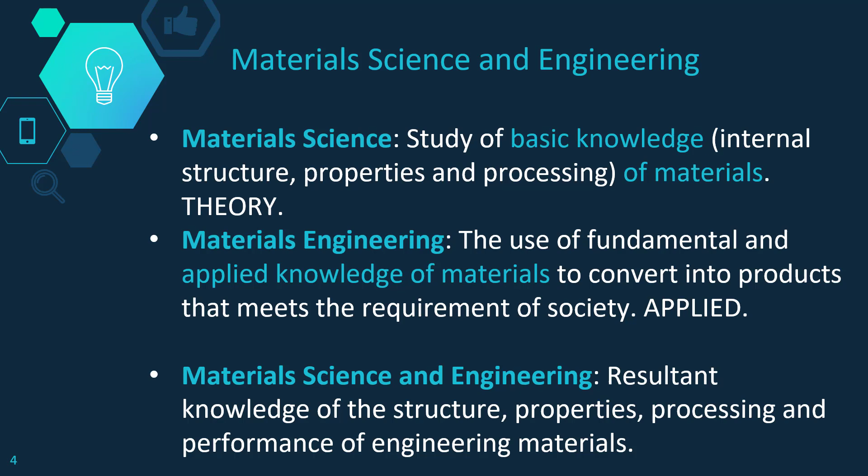So when we combine both of these, materials science and engineering, it becomes a resultant knowledge of the structure, properties, processing, and performance of engineering materials. Therefore, it is very, very important for you to remember this tetrahedron of material science and engineering, where we have the structure, properties, performance, and processing, which are interacting with each other. And when we understand that it is interacting with each other, then we could understand better material science and engineering.

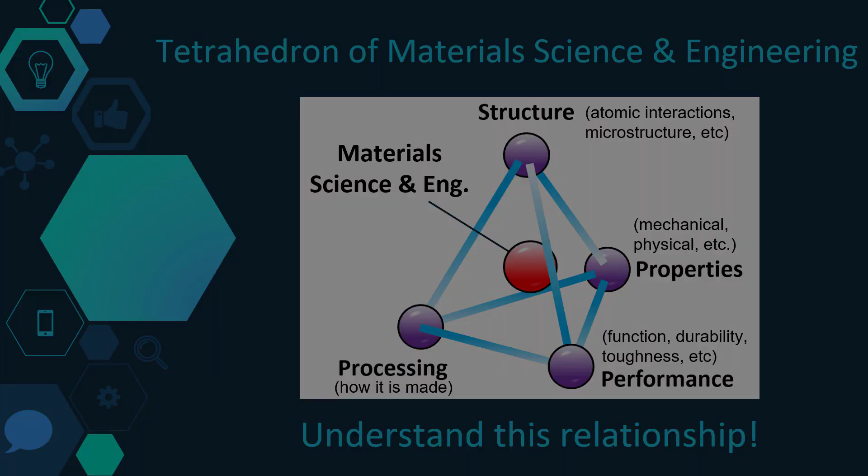Okay, moving on. As I mentioned before, engineering materials consists of several materials, and we're talking about overall materials available around the world. So one of which is metallic, polymeric materials, ceramic materials, composite, and semiconductor. In this course, we will be focusing more on the upper side of the materials list, particularly for metallic materials. But all of these materials have mechanical and physical properties we have to consider.

So as we mentioned before, when we say properties of materials, we are referring to the way the material responds to the environmental and external forces. So there are several properties of materials that you have to consider: mechanical properties, physical properties, electrical and magnetic properties, thermal properties, optical and chemical properties. So we will go through some of these one by one, but we won't go into much detail of some of the others, like optical properties, because this is a little bit more advanced.

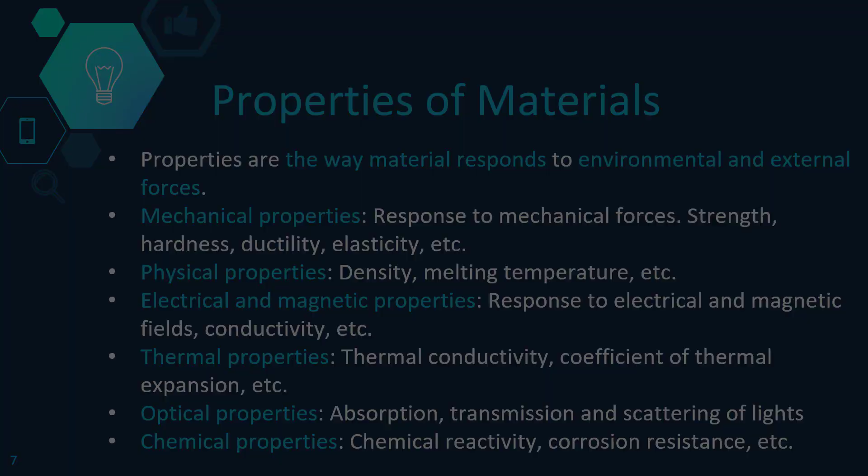Now, once we know that there are several materials around the world, and that all the materials have their own properties, then we understand that because of these specific properties, they are used in specific parts or specific functions. So one example here is engineering materials application in a car. Okay, so we have a car, and even though you don't take this course, you know already that cars consist of several materials and they are not the same. Some have high hardness, very good strength. Some have a very elastic property, some have shining properties, some have transparent properties, and things like this.

So in a car, in general, we can say that since steel is the most widely used metal in the world, ferrous, or what we call steel, makes up around 50 to 60% of the whole car. So the main material used in a car currently is iron or steel, which is ferrous material, and that is around 50 to 60%. What others are inside the car? So for instance, we have aluminum, which is around 5 to 10%.

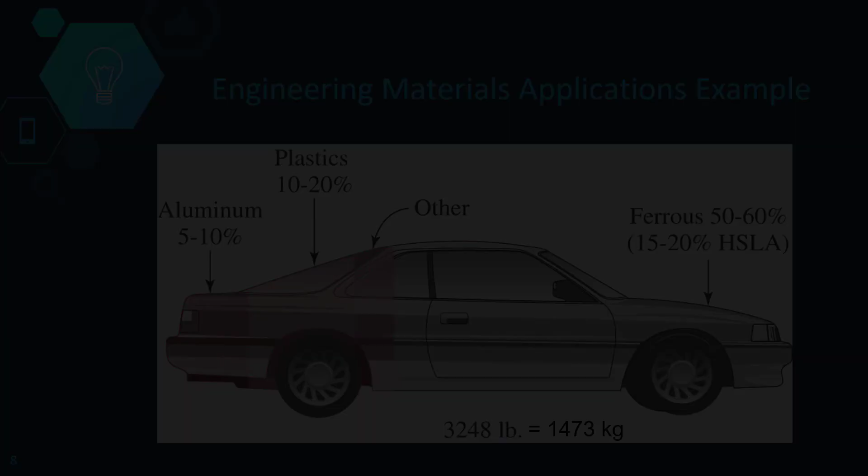Now we're going on to explain in general some of the materials that we've listed just now, for instance the metallic materials, the ceramic materials and things like this, in a little bit more detail. What we call metallic materials, by definition, are materials composed of one or two metallic elements that may also contain a non-metallic element as well. What we mean by metallic elements here is the chemical elements in the periodic table that we consider as metals. And some can also contain non-metal elements as well.

Some of the properties that are important in metallic materials are that they are crystalline in structure. We'll go into more detail on what crystalline means, but basically the atoms are aligned properly in the microstructure. They are also thermal and electrical conductors, so the heat conductivity is good and the electrical conductivity is good. We can conduct electricity through the material, and we can also conduct heat through this material.

They also have strong and ductile properties at room temperature. Usually metals are strong and also have ductility, which means that you can stretch the material to a certain extent at room temperature. Metals also have good strength at high temperature, and they are shiny when polished. Usually most metals are gray in color and have this shiny property as well.

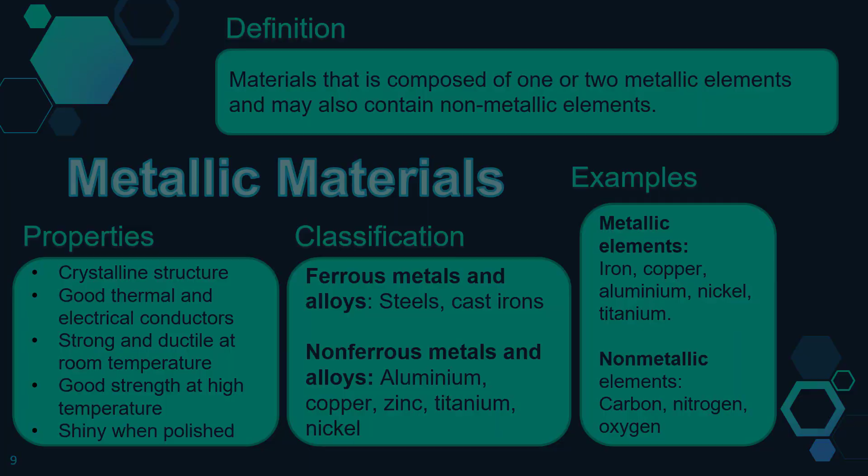Some applications of metallic materials. I think you are also aware of this; they're everywhere around us. For instance, aircraft turbine engine parts. Even though there are some other materials involved, the majority are metallic. There are also mechanical parts in your printers, in your mobile devices, in automotive engines. We have gears, valves, lots of other things. These are all metallic materials.

We also have bridge structures, where the main component is usually metal. The reason is that it's strong, which means cars can go over it without any issue of it breaking down. Even though there are still other materials like concrete, rubber, and some other components, the main structure is still metal.

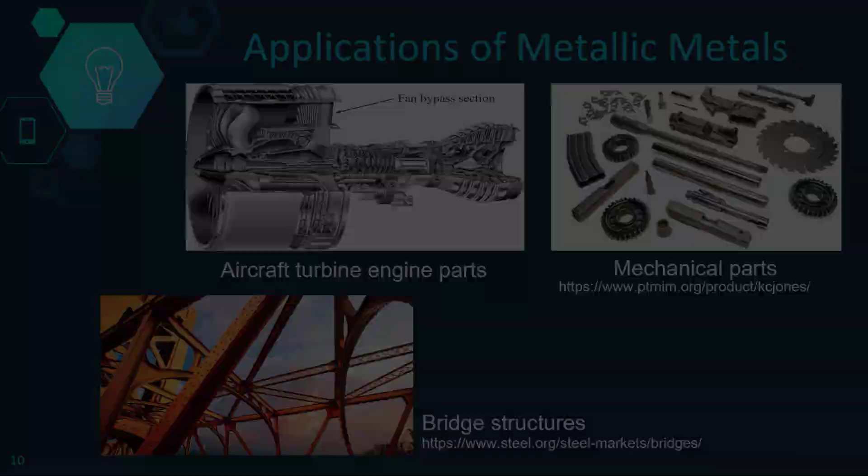Moving on to polymeric materials. By definition, polymeric materials are materials made of long repeating chains of molecules. At the atomic scale, when we look into it, we see the molecules forming long repeating chains of the same thing.

In terms of properties, most of them are non-crystalline in structure, and some are mixed, in the sense that they have crystalline and also non-crystalline regions. When it's non-crystalline, the structure of the atoms is not aligned properly. In some cases we call it an amorphous structure, and we will discuss this in more detail later.

Just a rough view of what polymeric materials are. It varies in strength and ductility, and it has a poor conductivity of electricity. So when you use polymeric materials, you cannot conduct electricity, but it has good insulating properties. So insulator means that it can retain the heat. So if you have heat involved, it will not make the heat go away easily. Okay, and it also has a lower density, which means it's lighter compared to metals, and have low softening

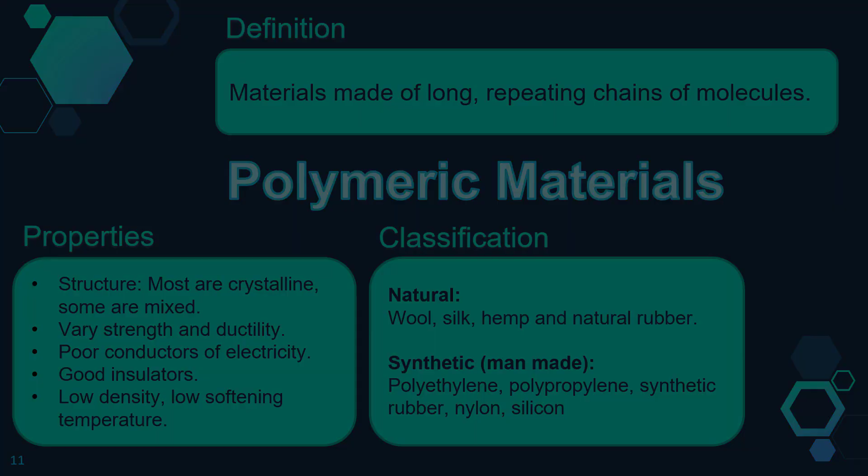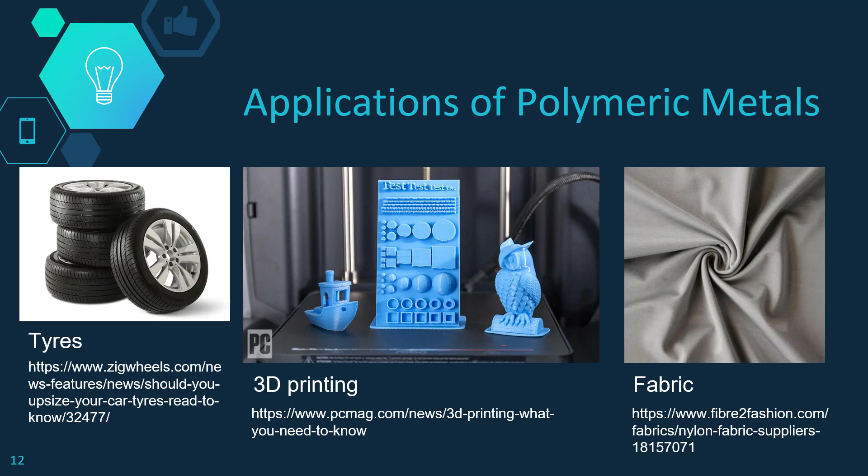Okay, so in terms of applications, you can see, for instance, tires, 3D printing also. So 3D printing, we're using polymers. We melt the plastic and then make the component layer by layer, and then we get this beautiful owl or other shapes. This uses polymeric material. So this is a typo there. And then we also have fabric like nylon. So nylon is made of polymeric materials as well, and it is also widely used around the world.

Now we go to the ceramic materials. By definition, it consists of metallic components and non-metallic components chemically bonded. So in the atomic structure sense, you will see that both of these are combined together, metallic and non-metallic elements. Usually a combination of semiconductor materials with oxygen, nitrogen or carbon. So this is just a definition. But the important one is it consists of metallic components and non-metallic elements as well.

Okay, what are the properties that make ceramic materials unique? It's the structure. So we have crystalline, sometimes non-crystalline, and sometimes a mixture of both. So this is kind of unique because metals are usually just crystalline. For polymeric, we have a mixture of both, but in this case you can have crystalline, non-crystalline, and/or a mixture of both. In terms of the property, it has very high hardness and also very high temperature strength. So even if you go to a very high temperature, it can still retain the strength.

It is brittle, lightweight, but high strength. So it has a very high strength, but at the same time, high strength means that it's brittle. It can break easily, and when you see the application, you will understand why this is the case. It has good heat and wear resistance, and it can reduce friction. So if you have heat involved, then the ceramic can resist the heat. So it is a good insulator as well. And at the same time, it has wear resistance, which means the shape of the material doesn't change easily. Again, it has an insulative property, in the sense that it retains the heat.

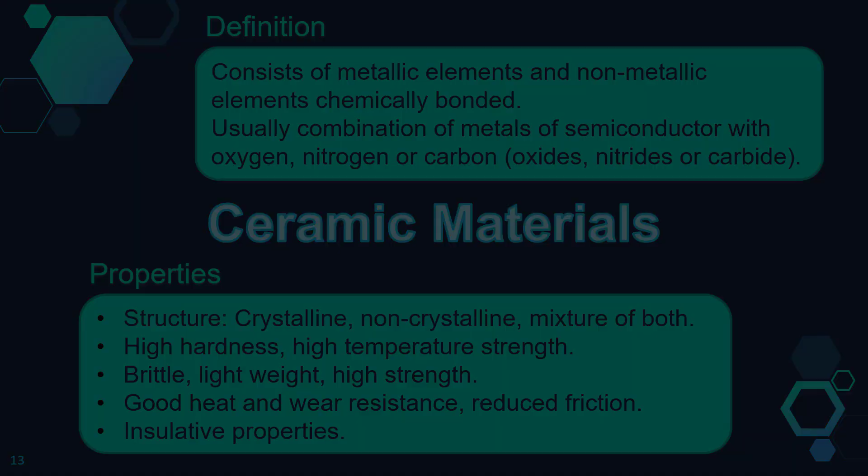Okay, some examples of the application. Sorry about that. We have a bathroom sink. So this is made of ceramic. So you understand that bathroom sinks have a very high strength. But at the same time, sometimes they can break. If you make it fall, then it will break easily. So even though it has good strength, it has a brittle property. Other than that, we have various components as shown here. You can even make a kitchen knife out of ceramic materials, and also bricks like this are made out of ceramic materials.

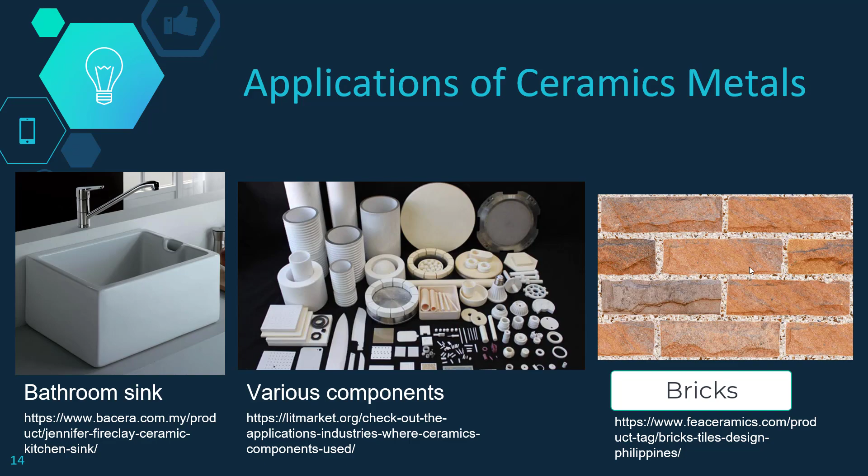Another category in materials in general is composite materials. I think we discussed this before. By definition, composite materials are made up of two or more distinct materials. So we have what we call a matrix and reinforcement. So what are both of these? The matrix is the main component of the material, and reinforcement is what we add to the matrix to make the property much better.

So this is kind of a hybrid of two materials to make the component much better. This is what we call engineering materials, because before this people used them separately, and then people thought about how to make the materials better, and they came up with a better solution by combining two materials.

So a good example here is concrete. Concrete is made of sand and cement, and when you mix these two together, you get concrete, right? With cement alone or sand alone, you get a separate property, but when you combine them together, you get concrete, which is much better than sand and cement in terms of strength and other properties.

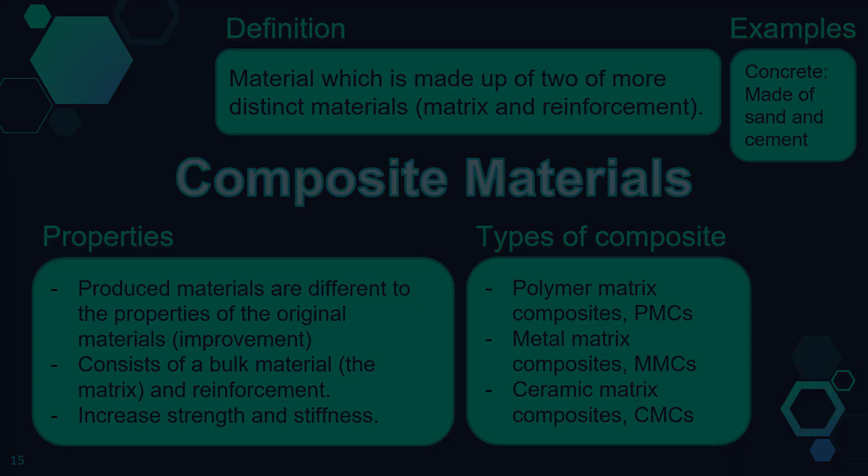Okay, so these are some of the applications of composite materials. We have here, for instance, a leisure boat, and most of these boats are made of a glass fiber hull, and the superstructure is also made of composite materials. Why we make it into composite materials is because, one, it becomes lightweight. At the same time, because it is a composite material, we make it stronger, right? So there is the strength, and we also have lightweight. We really would like to find materials like this, light and at the same time still strong.

Okay, and we also have, as we mentioned before, carbon fiber racing bikes, and we can see that the main component, which is the frame, is made out of carbon fiber. Again, why we use this is because we want it to be light, so the racer can go very fast. At the same time, we want the material to be strong, so even if the biker falls, the bike itself won't break easily, right? So these are two main properties that are highly sought after, the lightweightness and the strength of the material.

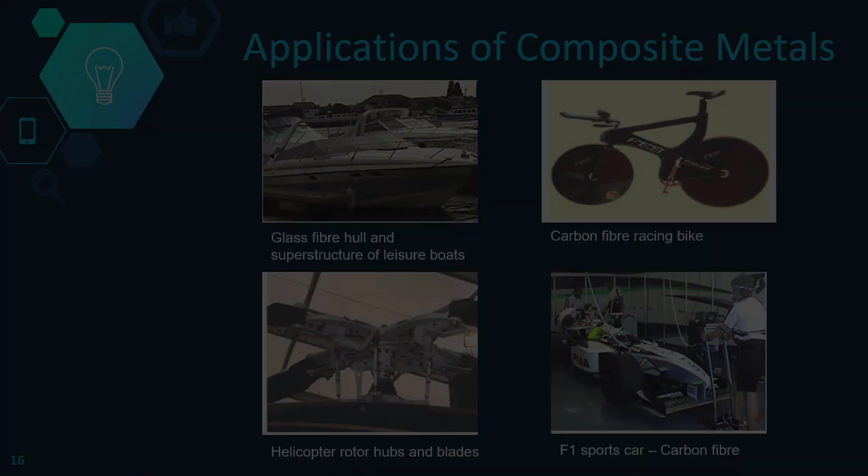Then we also have the last component, which is the semiconductor materials. This might be the one we talk about least in this course. By definition, it's a solid material that has a conductivity between insulators and most metals. As we mentioned before, an insulator is, for instance, the ceramic materials. It will not conduct electricity, it will not conduct heat. But metals can conduct heat and electricity very well. A semiconductor is between the insulator and metals.

The main application for semiconductor materials is basically electronic materials. In your computer, in your smartphones, and in most electronic devices, we have semiconductor materials inside. The properties are a little bit difficult to understand, but it's okay for now. Semiconductor materials are capable of altering electrical conductivities in their surface chemistries in very localized areas. So it has a unique property which is very important in electrical components, but we won't go into detail about that.

In terms of classification, there are two types. One they call N type, which has an excess of electrons, and the other is P type, which has a shortage of electrons. This plays a part in how the semiconductor material behaves in the electrical components of our electrical devices. I won't go into detail, but you can see here some of the components we have in our electronic devices, and these materials are very important to make the electronic device function well.

So we have metals, we have ceramics, we have polymeric materials, we have semiconductor materials, and whatnot. Now the question arises: how do we select a material properly? When we are tasked with a situation, do we just pick any material, or do we have a proper selection process? These are the three steps you need to consider, even for your upcoming projects. You might want to follow this selection process. There are just three steps.

First of all, you have to think about what the application is. What application do I want this material to be used for? When we know that, for instance, this is going to support other components, then we try to determine the required properties. When you want to support things, maybe you want it to be strong, so in terms of mechanical strength, we have to make it strong. You consider whether we need the electrical properties to be good or not. If you don't, maybe you can take that off. But you can also consider other properties as well.

Once you identify what property is needed for this application, we go to step 2. We try to identify the candidate materials. We say, okay, for this situation maybe metal is good, or in this situation maybe semiconductor is good, or polymeric materials. Once you know that, based on the structure, the composition, and the other properties, we go to step 3. We've selected the material, and now we have to identify the processing aspect. There are several types of processing, for instance, casting, sintering, joining, vapor deposition, and things like this.

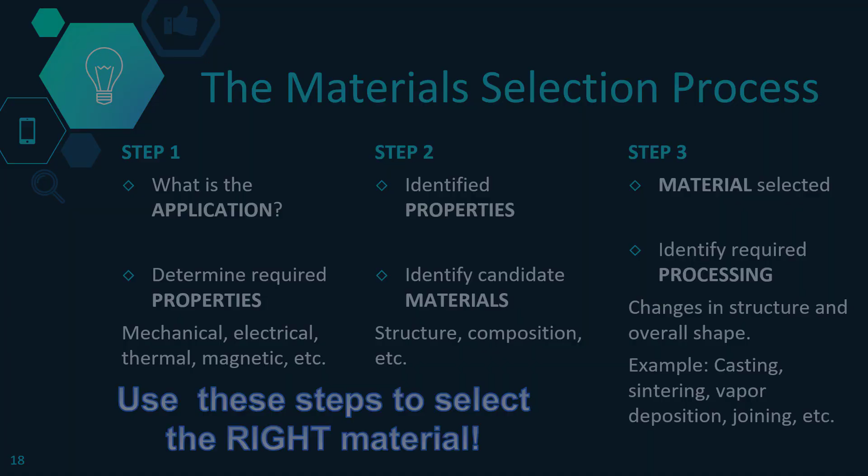So in summary, for the introduction to material science and engineering, we need to use the right material for the right job. There's no one wonder material. We have to think of what the material application is for, and understand the relationship between property, structure, performance, and processing. We will go into that in more detail after this; this is just a general introduction. We also have to recognize the new design opportunities offered by material selection. If we select properly, maybe we can think about new design opportunities.

Okay, so I'll leave this to you to read some of the tutorial questions. We can discuss them in more detail in our next class.